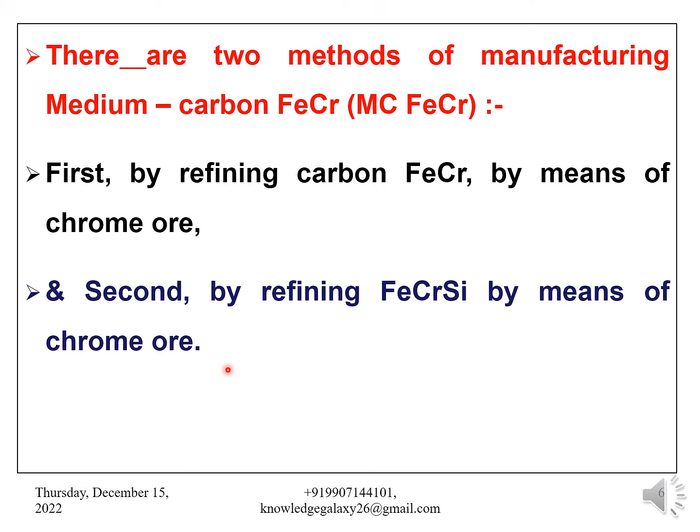There are two methods of manufacturing medium carbon ferrochrome, that is MC ferrochrome. First, by refining carbon ferrochrome by means of chrome ore, and second, by refining ferrochrome silicon by means of chrome ore. So we will be discussing in detail about both these processes. So let's move forward. The second method, known as electrosilicothermic, was employed mostly.

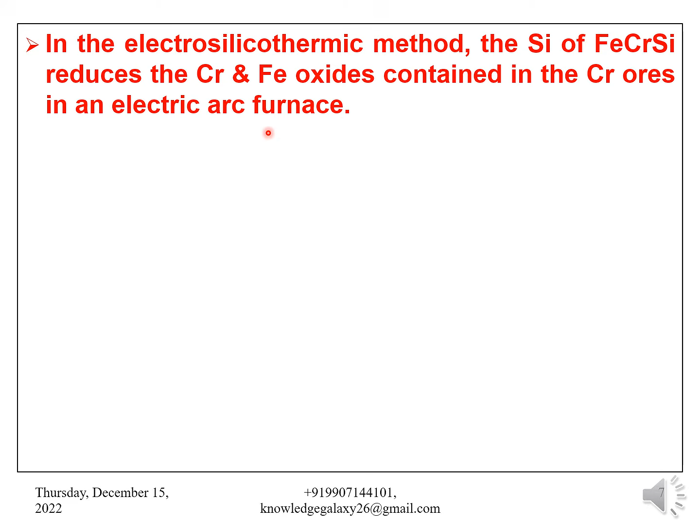In the electrosilicothermic method, the silicon of ferrochrome silicon reduces the chromium and iron oxides contained in the chrome ores in an electric arc furnace. The manufacture of refined ferrochrome by the electrosilicothermic method proceeds according to the following reactions. So these are the main important reactions to manufacture medium carbon ferrochrome by the electrosilicothermic method.

The first reaction is 2Cr2O3 + 3Si = 4Cr + 3SiO2, and next is 2FeO + Si = 2Fe + SiO2. My dear friends, as is evident in these two reactions, the reducer is silicon and it replaces chromium and iron from the melt and subsequently frees them and makes them available to form the alloy. I hope it is very clear to you.

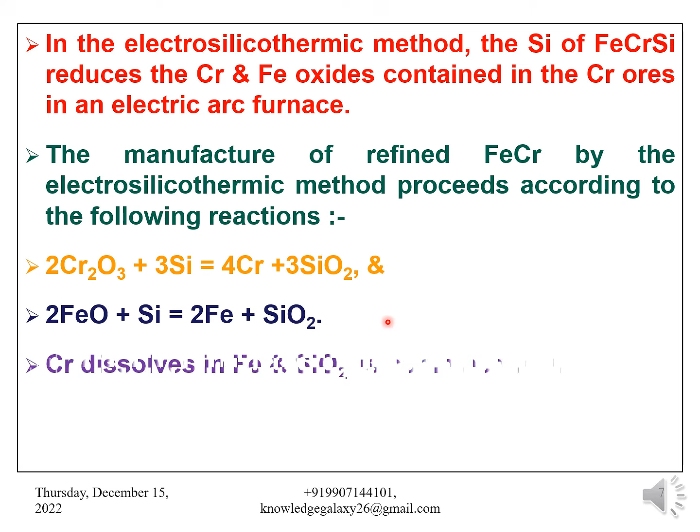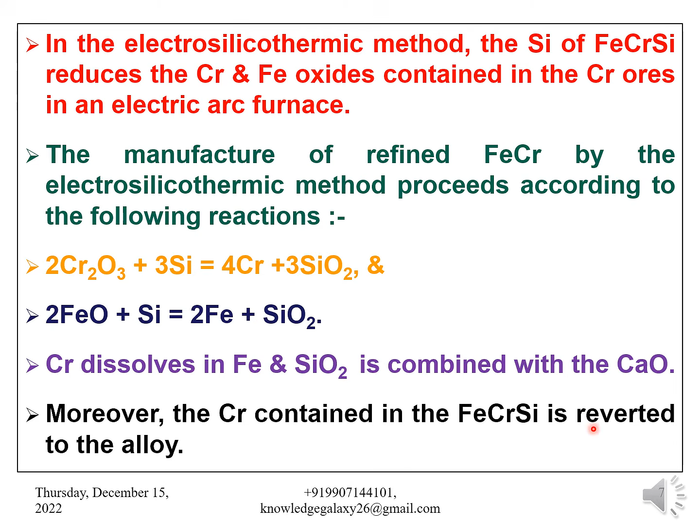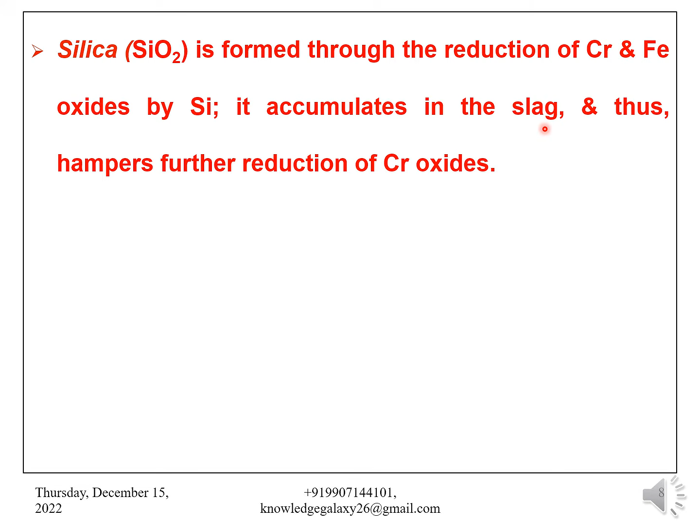Chromium dissolves in iron and SiO2 is combined with the CaO. Moreover, the chromium contained in the ferrochrome silicon is reverted to the alloy. Silica, that is SiO2, is formed through the reduction of chromium and iron oxides by silicon. It accumulates in the slag and thus hampers further reduction of chromium oxides.

In the electrosilicothermic method, lime is added to the melt to decrease chromium losses as Cr2O3. The CaO contained in lime bonds SiO2 into calcium silicates CaO.SiO2 and 2CaO.SiO2, thus facilitating chromium oxides reduction in the melt.

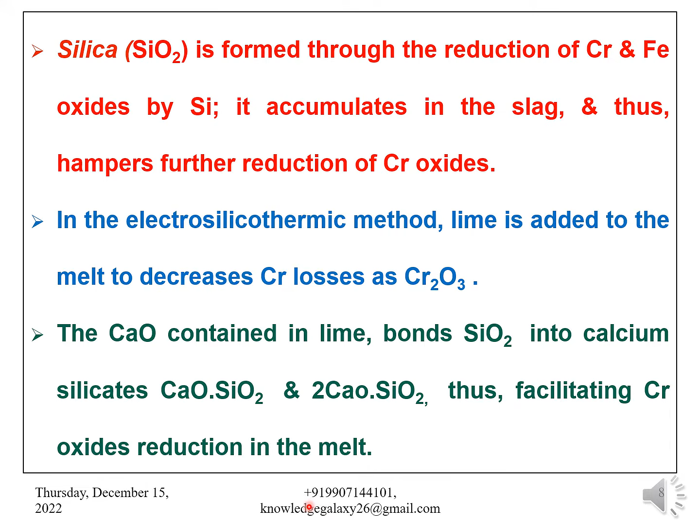Until recently, medium carbon ferrochrome was smelted by the flux-free method based on the refining of the poor ferrochrome silicon, that is containing 27 to 34% silicon and 40 to 46% chromium, by chrome ore without lime. So I hope this is very much clear to you that lime is used as a flux, and if you don't use lime, then it is called flux-free method.

The rich slag having 27 to 35% Cr2O3 thus obtained was used for smelting foundry and carbon ferrochrome.

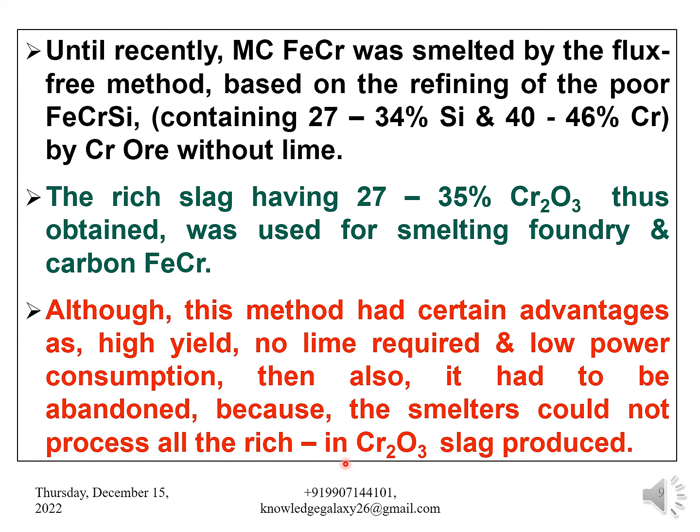Although this method had certain advantages as high yield, no lime required and low power consumption, then also it had to be abandoned because the smelters could not process all the rich in Cr2O3 slag produced.

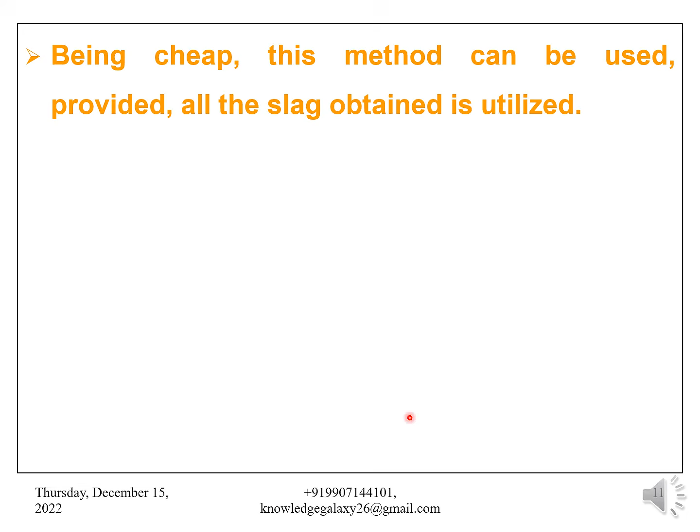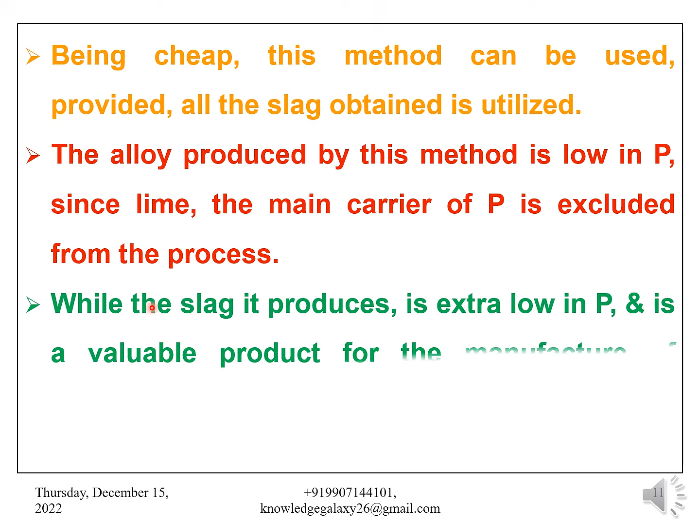Being cheap, this method can be used provided all the slag obtained is utilized. The alloy produced by this method is low in phosphorus since lime, the main carrier of phosphorus, is excluded from the process. While the slag it produces is extra low in phosphorus and is a valuable product for the manufacture of foundry ferrochrome.

Medium carbon ferrochrome is currently produced by the flux method in electric arc furnaces with a line voltage of 300 volts. The mixture is composed of chromium ores, lime, ferrochrome silicon and foundry ferrochrome. Foundry ferrochrome is introduced to raise the carbon content in the alloy.

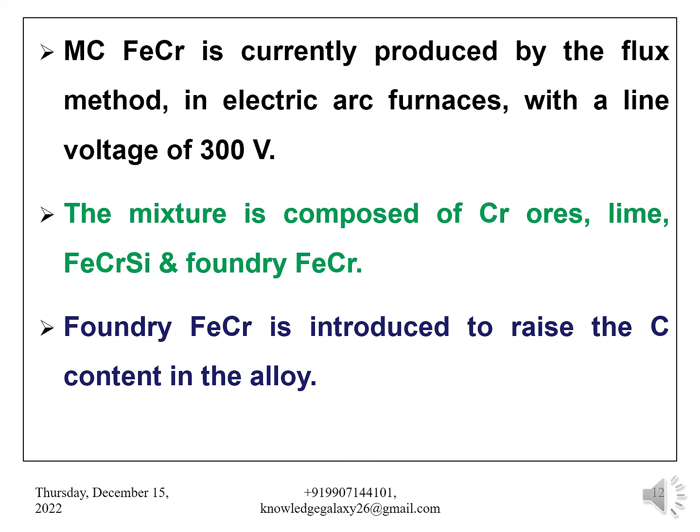Medium carbon ferrochrome is smelted by flux method in 3 stages. So there are 3 major steps in production of medium carbon ferrochrome, which I am describing just now. The first step is charging and meltdown. Next step is charging of the second batch, meltdown and slagging off through a tap hole into a ladle.

And third and final step is meltdown of the third batch and alloy tapping through the metal tap hole into a slag-filled ladle. I hope these 3 steps are very much clear to you all.

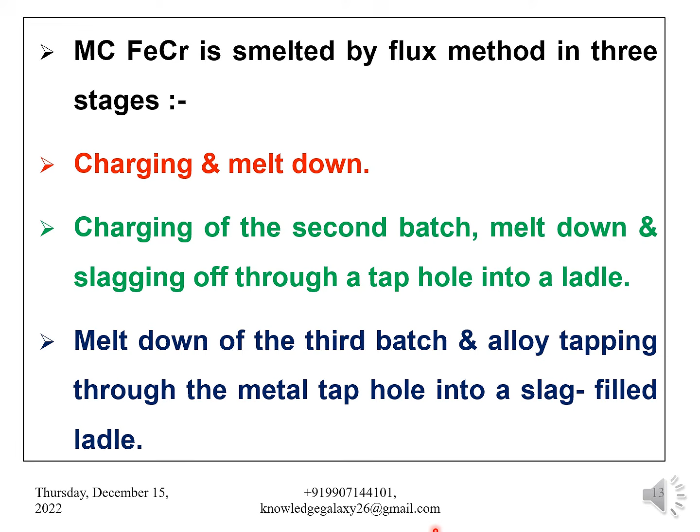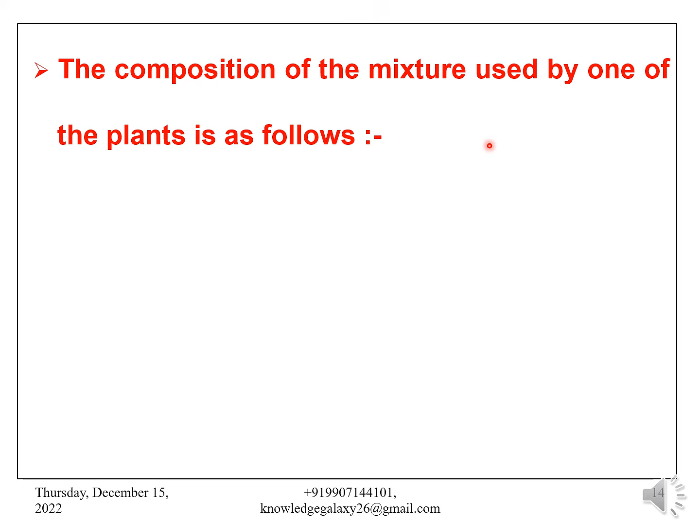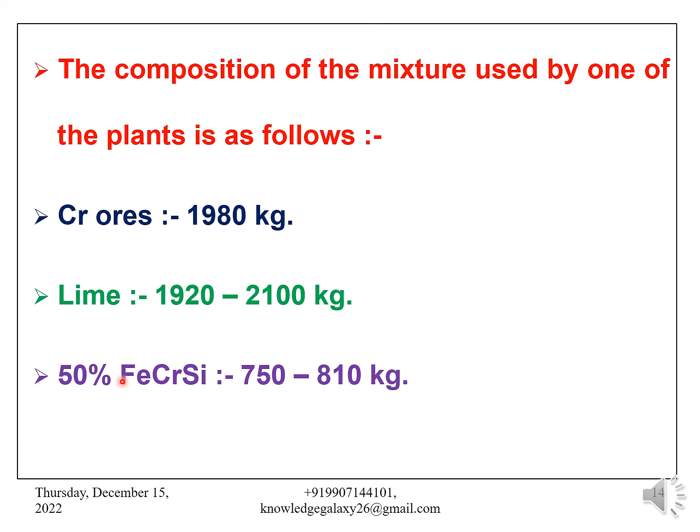Moving on. The composition of the mixture used by one of the plants is as follows. Chromium ore 1980 kg, lime 1920 to 2100 kg, 50% ferrochrome silicon, that is 50% grade of ferrochrome silicon, its quantity is 750 to 810 kg, and foundry ferrochrome is 140 to 160 kg.

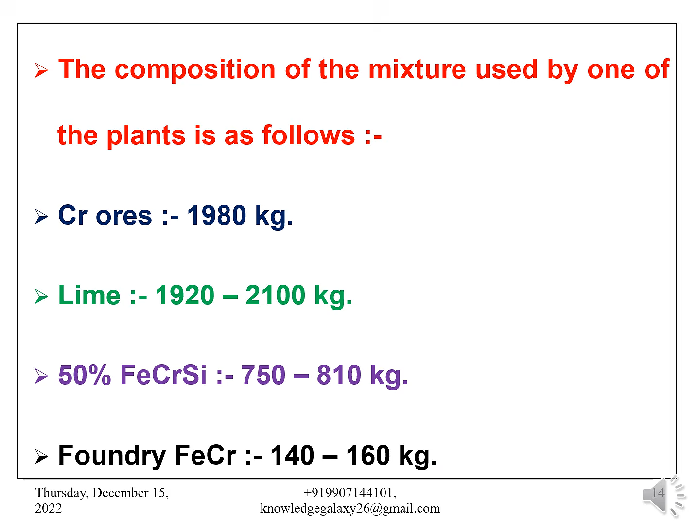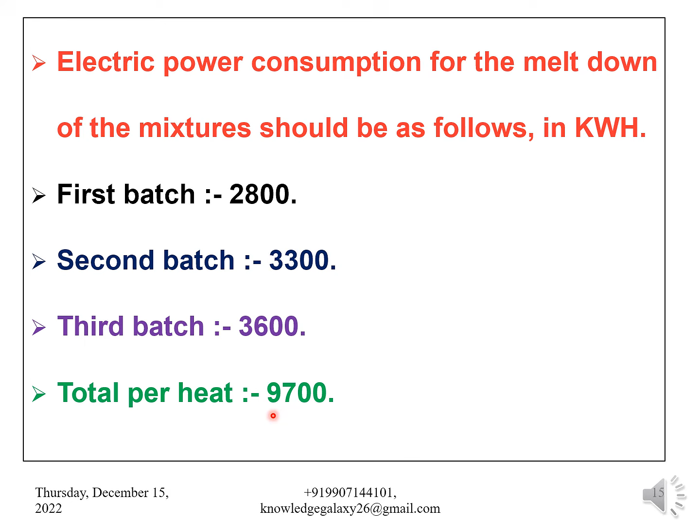Electric power consumptions for the meltdown of the mixtures should be as follows, all quantities in kWh. First batch 2800 kWh, second batch 3300 kWh and third batch 3600 kWh. So total per heat power consumption for meltdown of the charge comes to 9700 kWh.

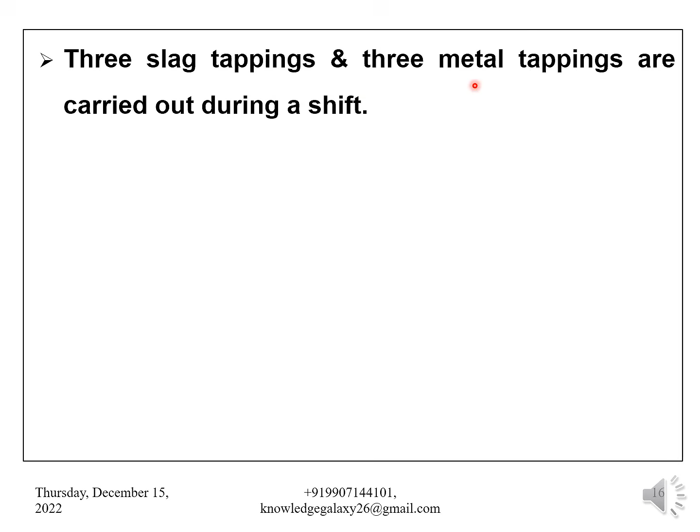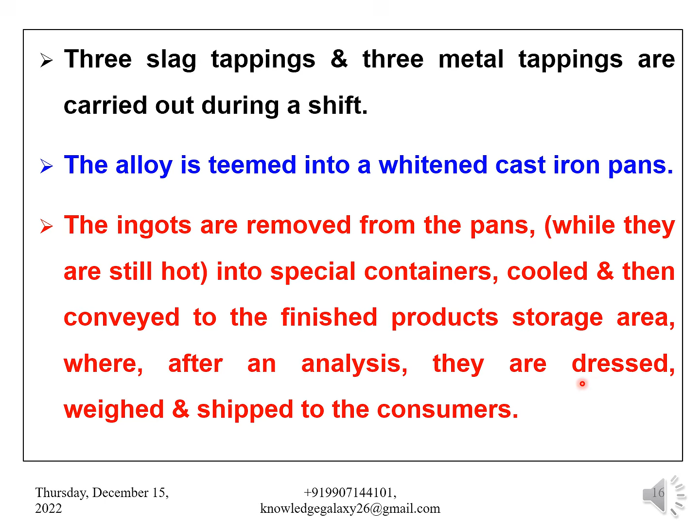3 slag tappings and 3 metal tappings are carried out during a shift. The alloy is teemed into whitened cast iron pans. The ingots are removed from the pans while they are still hot into special containers, cooled and then conveyed to the finished products storage area, where after an analysis they are dressed, weighed and shipped to the consumers.

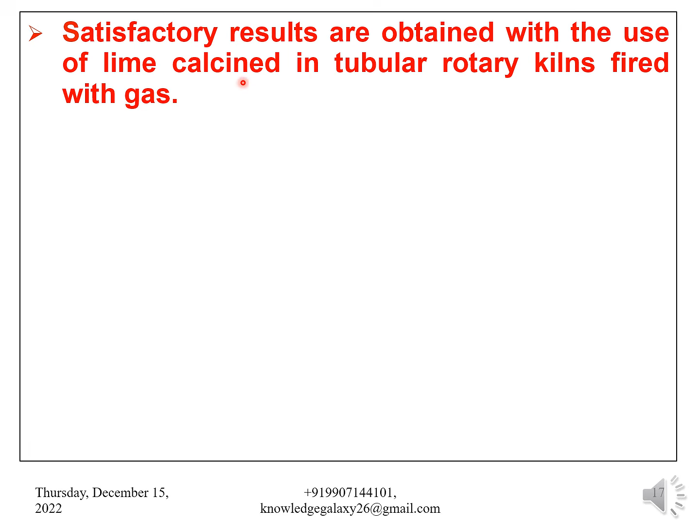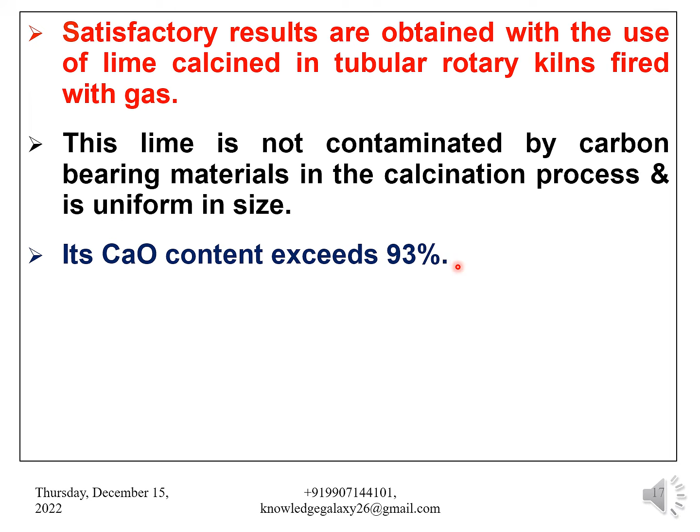Satisfactory results are obtained with the use of lime calcined in tubular rotary kilns fired with gas. This lime is not contaminated by carbon-bearing materials in the calcination process and is uniform in size. So this is the major advantage of using calcined lime in production of medium carbon ferrochrome. Its CaO content exceeds 93%. Raw materials used should be carbon free. The composition of mixture is set according to the calculations and is checked during the smelting process.